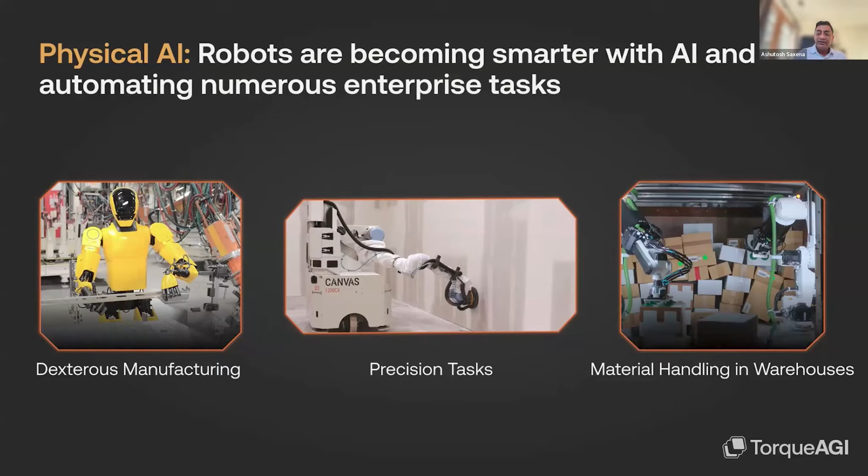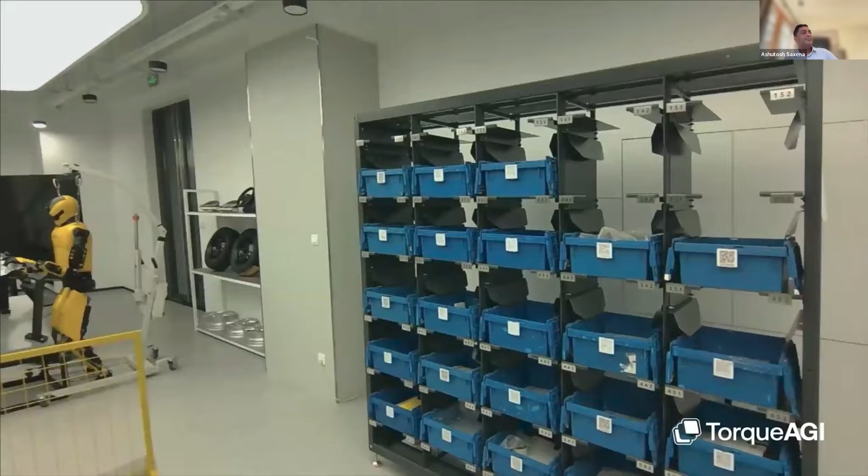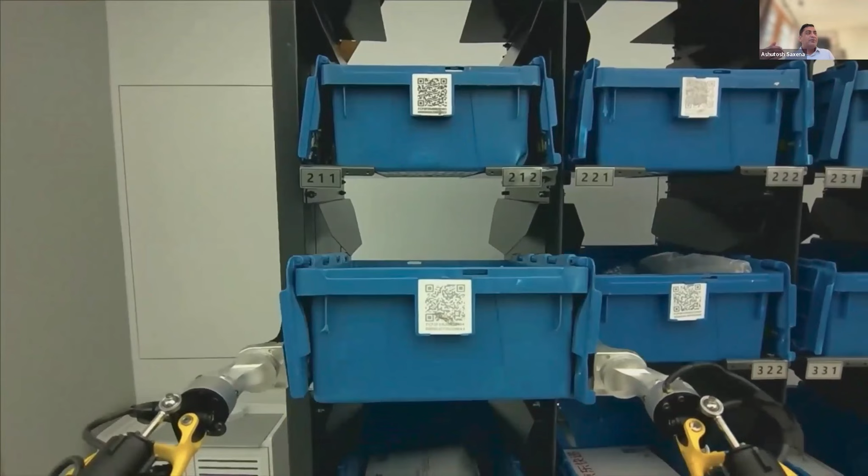And here's a quick video. So here it's a humanoid robot in an automotive factory. There are wheels over there, and it has to reason about the world, find where it should walk, where is the tote box, think about, oh, I need to slide that box first before I can grab it because it has some constraints. And once it has slid like that, then it can pick it up, right? So this is a sequence of tasks that the robot must do, which basically go in the three categories: perception, reasoning, and then acting on it, reacting on it.

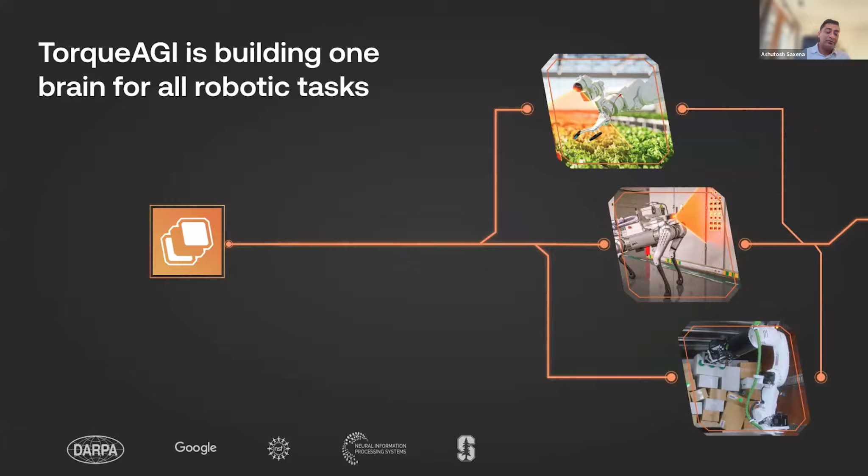So we are essentially building one brain that can deal with variety of robot form factors, all the way from agricultural robots to supply chain robots to different types of robots. And then this is a similar unlocking that has happened in digital AI, like with ChatGPT, that now it is actually possible to build one AI that can be embodied into different robotic form factors and be made functional.

So one of the common themes is obviously data, right? Like how do we get data? How do we train a model? Now that's where the gap arises. So a long time back, in about 2013, when we were doing research, we said, okay, we are going to look at some very interesting tasks. Like let's get a robot to cut food in household environment.

So this is a robot. It has two arms, and the goal is there are about 100 different food items. There are about 500 different recipes. Can we get a robot to perform these tasks, right? So first thing we did is we went online and downloaded billions of images, videos, and robot action data.

We created some training systems, and what that allowed us to do is to train a large model. Now, this was not very large. It was only, I think, about 100 million or 200 million parameters. This was from 8 years back.

But one of the exciting things that opened our eyes was, if you look at it, this is a projection of one of the inner layers of the network that different modalities, which is text, 3D shape, and images were all co-located into the same part of the space. What it means is, if you think about a cup, you say a cup, or you give it a picture of the cup, or you give a 3D model of the cup or a point cloud of the cup, it's all in the same space in the network, in the latent space.

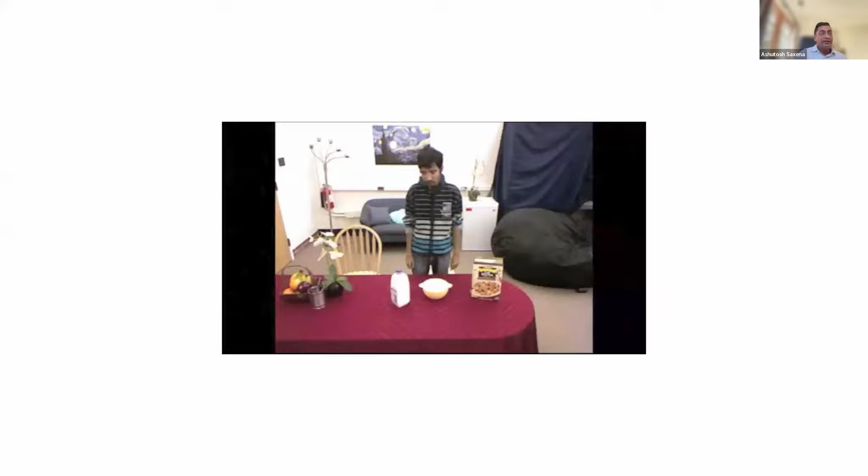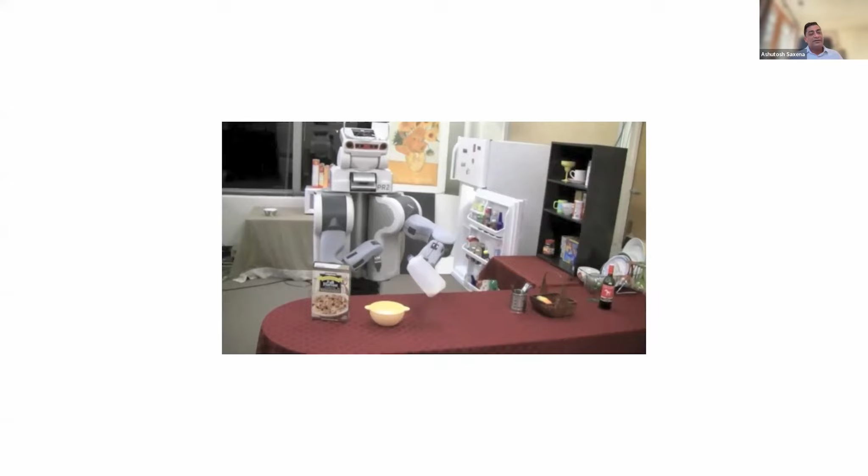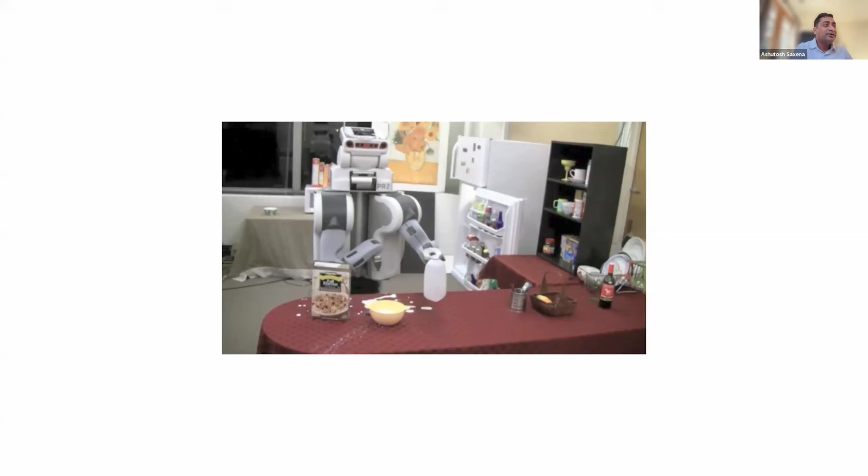So one thing we found by doing a variety of these different works is brute force data collection is costly. So when there was this RT2 paper in about 2023, if you look at, there were a dozen robots, and the task was to open this shelf, the office shelf, and every shelf is similar, every robot is similar. You just have to spend about 50 million or $100 million to collect a lot of data. And if you collect that much data, then you can clone the behavior and then you can start opening the bookshelves. So that's a challenge.

That makes it infeasible. So now what happens is, if we take the same brute force approach of collecting extremely large amounts of data to train physical AI models, the reason it worked in the space of digital AI is because there was a lot of data already available. So when people started training the models, there was 20 years of data already on the internet that you can consume to train the models. That is not the case with physical AI.

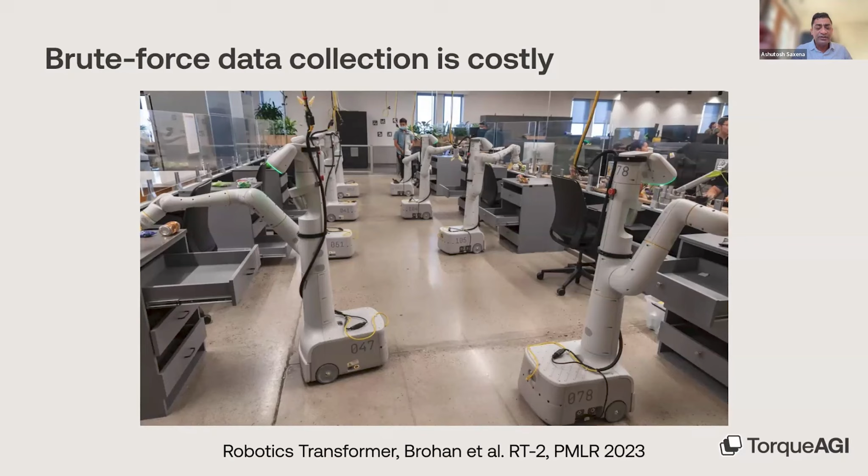Now we can obviously do some data collection by having the robots go in the world, by having videos and so on and so forth. But the gap between the data that we can collect and the data we need in a brute force approach is more than 4 or 5 orders of magnitude. And that's a very big gap.

So at TorqueAGI, what we realized is we have to capture the unique nature of the physical world, which is actually physics, right? So I'll talk about it through an illustrative example. So one of the elements of physics is kinematics. So this particular work was about tracking humans, following their gait, and so on and so forth. And here, what happens is you can take a large amount of data to learn about human gait and behaviors, and then you need millions of data points to train a model.

And the point of this work was, as an illustrative example, if we take the human being and break it into a graph, where the legs are separate, the arms are separate, and this is the isomorphic transformation between this graph and the models. And you are training the models. What happens now is suddenly you have the ability to compose the models. You have broken the problem into small parts, because humans and robots have a kinematic form factor.

So by using that, again, as illustrated in this video, what you will see is the effect of composition, right? So here is a human on the left, which is slowly walking, and the human on the right, which is walking fast.

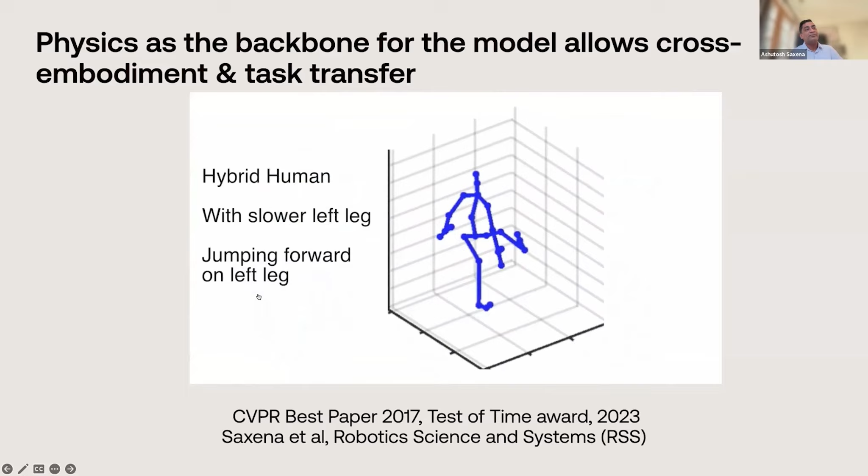And now if you combine these two things, the slow and fast human, you get the effect of a combined walking behavior. So what that means here is that if we start adding this physics reasoning, we can get very powerful cross-embodiment and 1000x data efficiency.

And some of the people in the field like Ilya, Yann LeCun, and others have really been making the point that for an LLM, the amount of training data required to train a model is insanely large. A child is learning intuitive physics like object permanence, gravity, kinematics, and so on, which the current models are not doing.

So, based on this philosophy, what we have done is we have designed our loss function to be cognizant of physics. In a typical large transformer or large scale model, you have, for example, a cosine loss function, which is a great loss function for word vectors or tokenization, where you are taking the cosine angle between the two vectors. But it turns out that if you are dealing with the physical world, a loss function which is motivated by physics is very, very powerful.

So what we have done is incorporated physics-based loss functions and physics neural operators as part of our transformer architecture. If we have an industrial arm unloading boxes in a truck, those get embedded appropriately into a loss function. And if later on we want to train a humanoid on a similar task, sure, the humanoid is not the same as an industrial arm, and this automotive part is not the same as boxes. But as far as AI is concerned, if transformed through appropriate architectures, it starts to work. So we are seeing a very powerful effect of that.

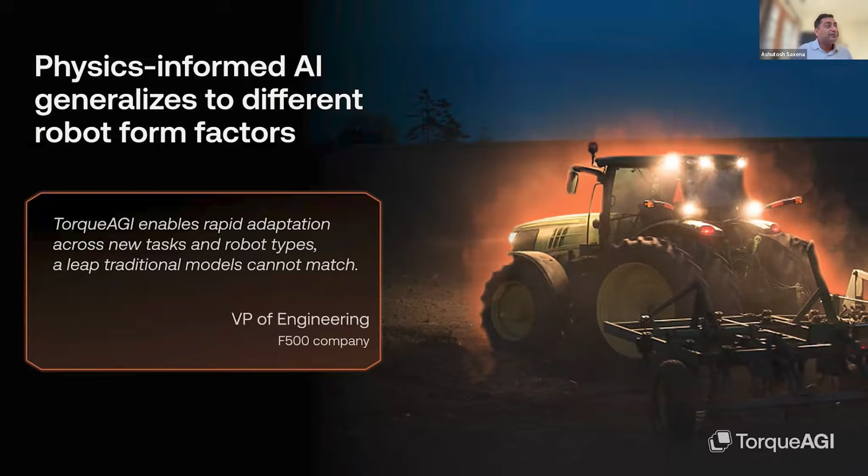Digging a little deeper into the technical architecture, the way it works is that in real time, the input is coming. You have embeddings that map the different modalities, all the way from touch to word vectors to 3D to trajectories, into the same space. This physics-informed VLA model has a loss function which is very physics motivated. The physics neural operators are helping different elements as a tool that is available, and the agents are providing interpretability.

So while the model is one model embedding all different sensor modalities and all different tasks, the agents provide interpretable, modular use of the model. And obviously agents are nothing more than a set of prompts, memory, system, and so on and so forth.

There's one more important part to all this. To get this to work in production, it has to work in real time. And that's a big challenge because the VLA models are good at reasoning, but the problem when you put them in a control loop is that they become extremely slow. So we have achieved 30 FPS performance by really nailing down the GPU orchestration.

So the data goes into the GPU, the model lives in the GPU. This is a heavyweight 27 billion parameter model, optimized for GPU processes. The agents that are providing the output and flow are using pointers, and these are very thin agents.

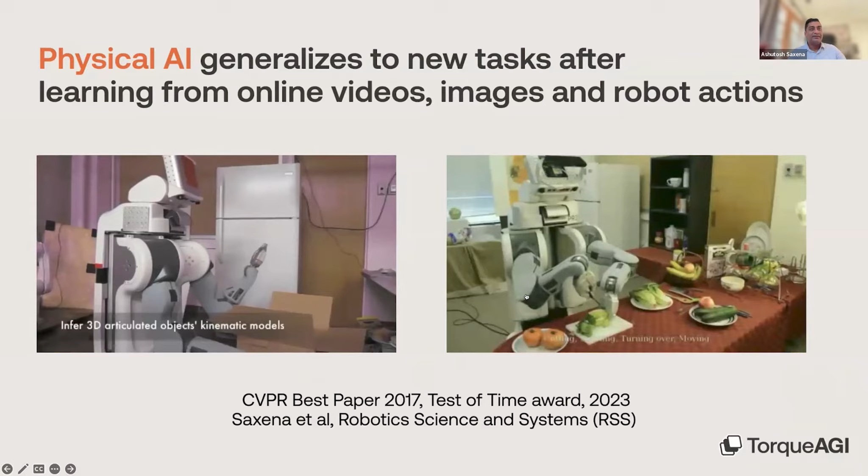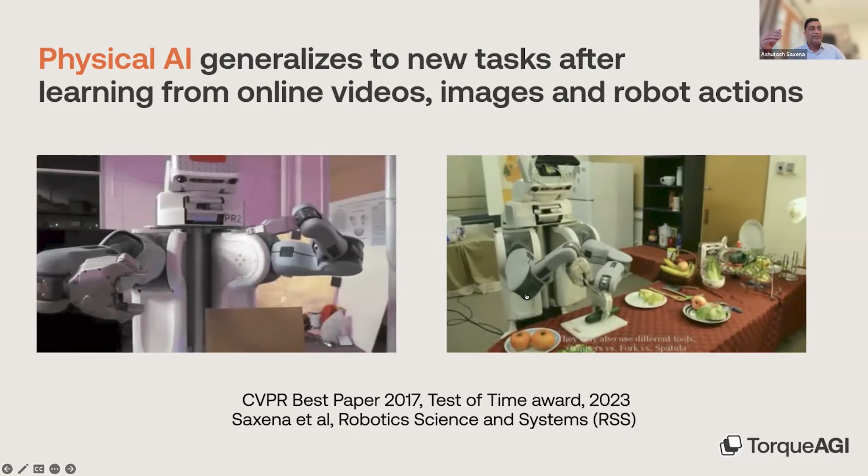So with a blunt knife to cut a variety of food items from tomatoes to lettuce to cucumber to so many other things, it is a pretty challenging task. And the reason it is able to work through that is it is learning a mental model of basic physics. As it is manipulating the box, it is making a mental model of, oh, box has articulation. It has a few other things. And that allows us to perform many tasks, including long horizon tasks.

So this video is a little. Take some coffee in a cup. Add ice cream of your choice. Finally, add raspberry syrup to the mixture.

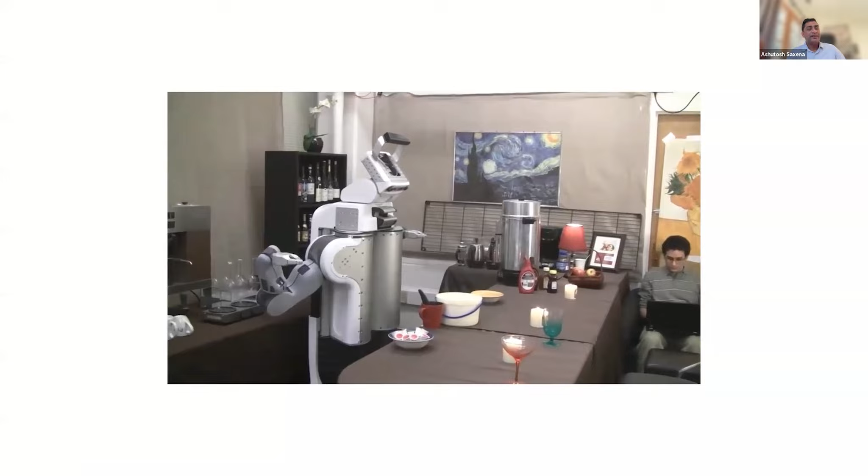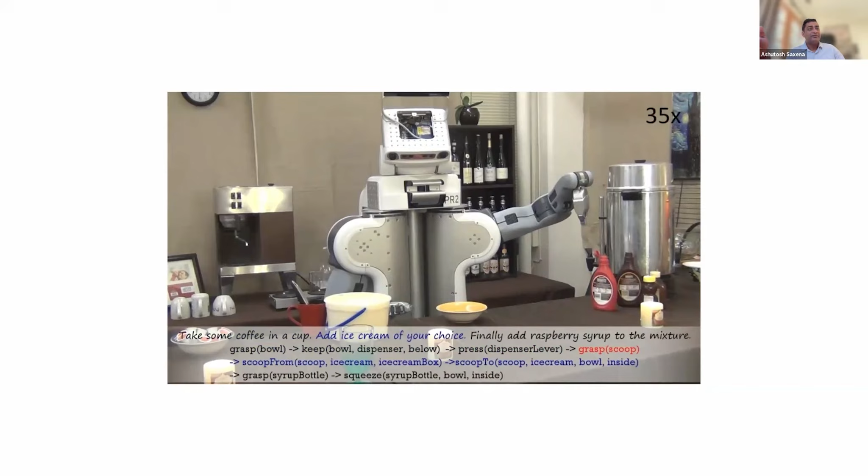So in this case, the person asked to make something called an affogato, which is take ice cream of your choice, add raspberry syrup, put some coffee or something else in it. So the robot is able to map and reason about, oh, I have to get coffee. So is it a coffee mug or is it a coffee dispenser? If it's a coffee dispenser, how do I press the particular lever?

If it's an ice cream, I need to do a scooping action. And if I have to now go use the raspberry syrup, what is the motion I need to do? So it's able to sequence long horizon tasks in a thinking or a planning loop, and then execute on it through a React loop at the bottom. So it's a two-tier architecture that is being implemented here.

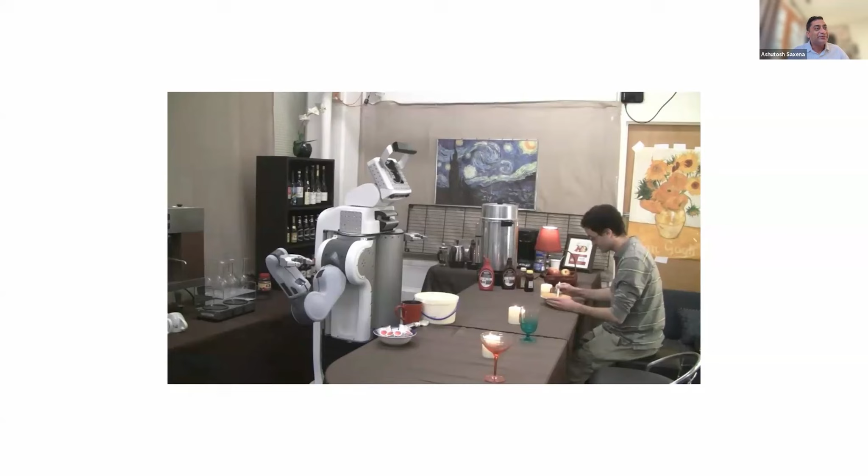The funny thing is, this particular video, this is from about 7 years back. It took forever to get the ice cream, so ice cream had melted back then. But now we are living in a different world. The GPUs are more powerful. We can run things in real time, and this is the most surprising thing that we found.

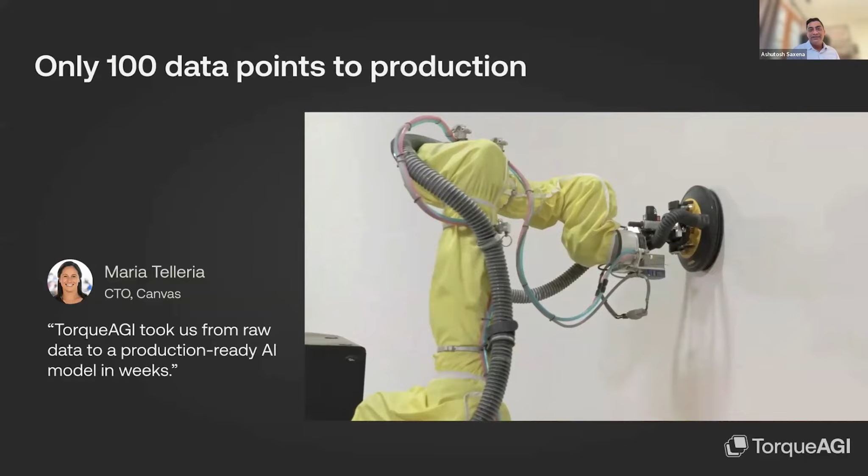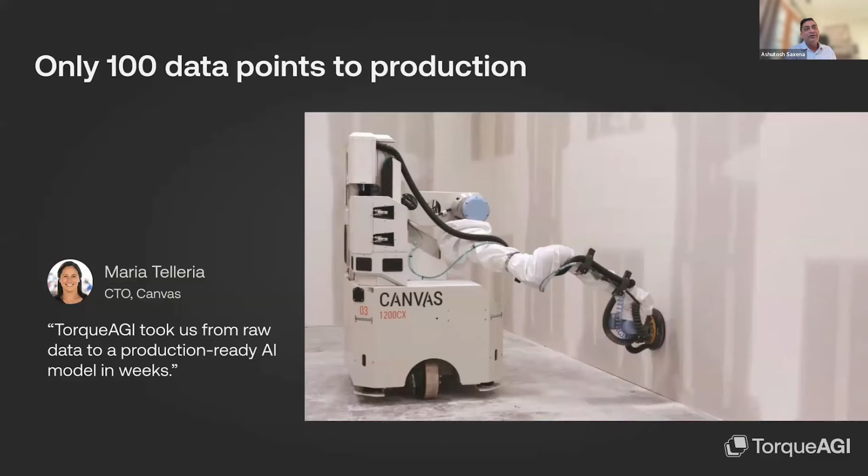That as we implemented these techniques on, for example, this construction robot, which is doing painting, and for those of you who have ever dealt with construction or drywall, this is a very hard task to make a smooth drywall. You have to paint, you have to scrub, you have to find out the seams, and so on and so forth. And the interesting thing is to get the full production power, we had to only use about 100 examples.

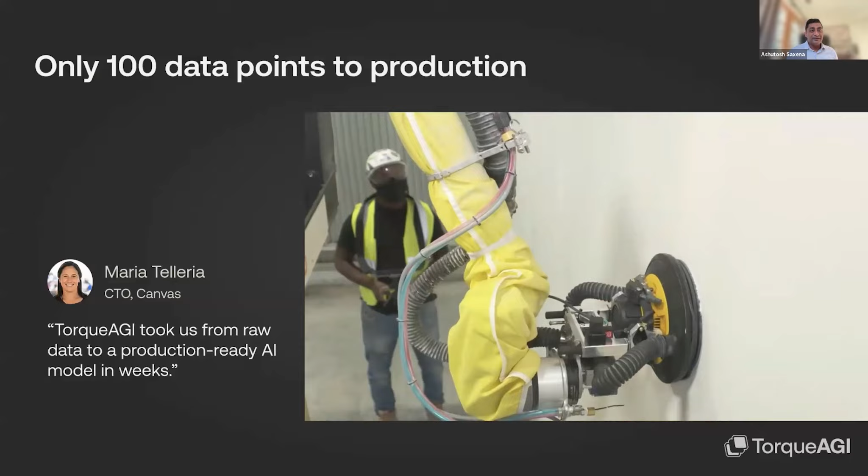And the reason is it has a very strong base knowledge of the world based on internet data, public data sets, and so on and so forth. Then it has learned a reasonable model of the physics. With those two, it has to only see a few robot examples to get performant output. That is why it is able to do this for only 100 examples.

So the real way to use the model that we are going forward with is that we have a general model, and we are creating specialized agents for different robots and different tasks within each robot. And this is how it looks like. So think of the model as the back end, and the agents at the front end. Agents define what you want to do.

One of the reasons that this architecture is more useful than an end-to-end architecture, which we don't like, we like this interpretable modular architecture, is because it gives a product handle or interpretability to the equation. Now, human and the obstacle, for a robot, they are the same thing. Humans are obstacles your robot wants to avoid. But it turns out the requirement to avoid humans is 99.999 versus obstacles which you can once in a while bump. So this provides that level of interpretability.

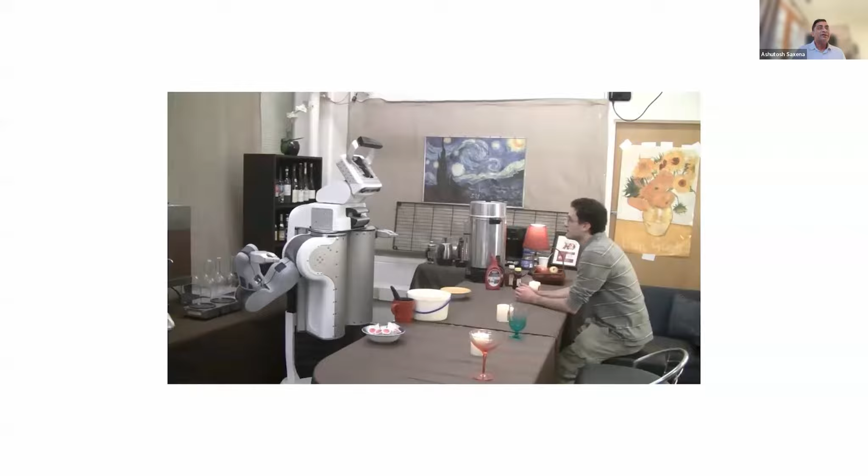And to answer the question, yes, the model can ingest a variety of different form factors, or this is how it's working for a variety of different sensors, whether it is 3D, 2D, action, trajectories are all embedded into the same model space. So as far as the model and the agents are concerned, it is very agnostic, and it can work with a variety of different sensors from 3D, 2D, audio, trajectory data, and so on and so forth.

Coming back to here, and now moving on, the way we are programming robots is entirely changing. Earlier, for each of these boxes, you would write a traditional computer program, and you would use one specific AI, maybe a trained model. That's how it used to work. Now what is happening is, excuse me, now what is happening is you are looking at an entirely new way of programming robot structures.

So you have a very powerful model in the back, which is living on the edge, on the robot PC, in the GPU. And now, when you are using the model or harnessing the model, you are designing it through an agent. An agent is a set of prompts, memory, tools, and certain parameters. So in 80% of the cases, you are no longer writing traditional computer programs.

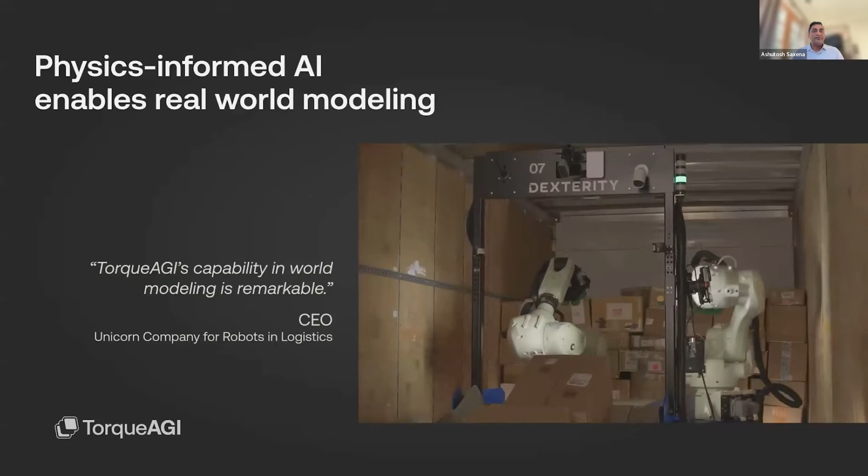And this physics is what is really giving it that power for a world model. So if you look at some of the examples, when you think about these boxes piled up in the back of a truck, given the noise in the sensor data, the nuances of doing robot control, it's a very hard problem, even in that narrow space. So the model has to reason about which box is on top of the other box, what is going on, and that is what is allowing these robots to perform in practice. For example, you have criteria about how to pack these boxes in a nice way and do it in an efficient manner. So this is what a typical application looks like in this box packing space.

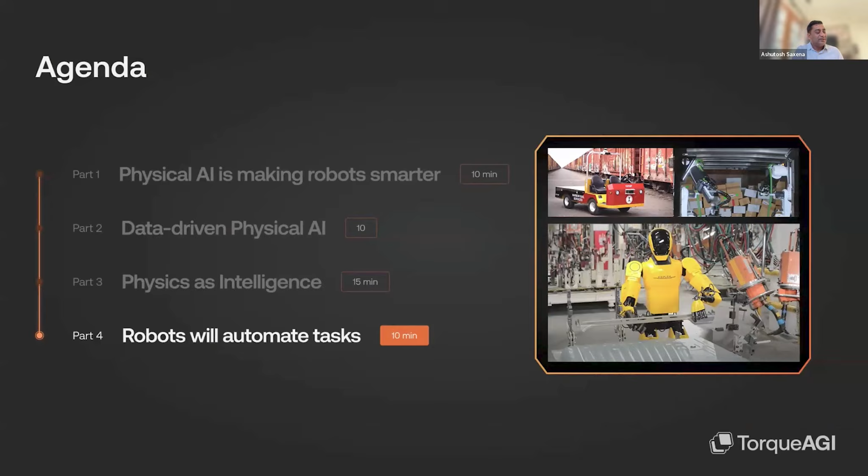I will show you a few more examples of how we have taken our model, distilled it for a particular application, and built agents out of it. So we already talked about the box handling scenario, and this is a little bit more insight into what it is actually doing. So of these agents in this logistics example, one agent is making the robot cognizant of humans in the environment. So a robot should slow down if a human is around. The second one is saying, oh, I have found the boxes, but how are they packed up? What goes on top of each other, and so on and so forth. So now you can extend it.

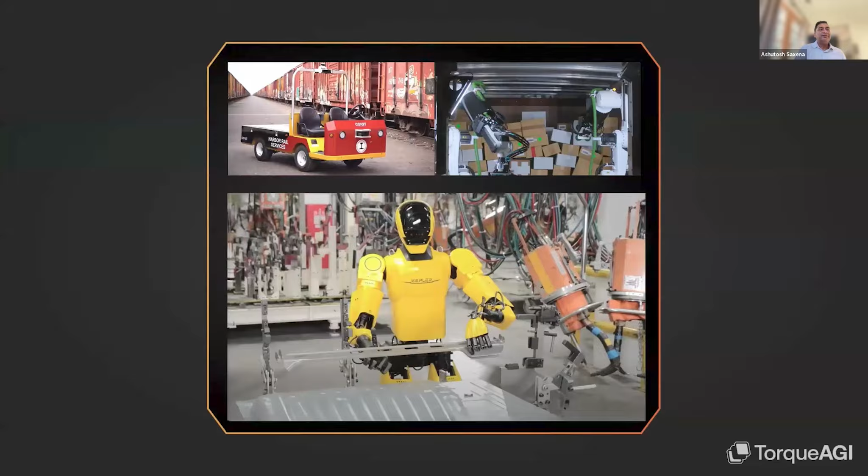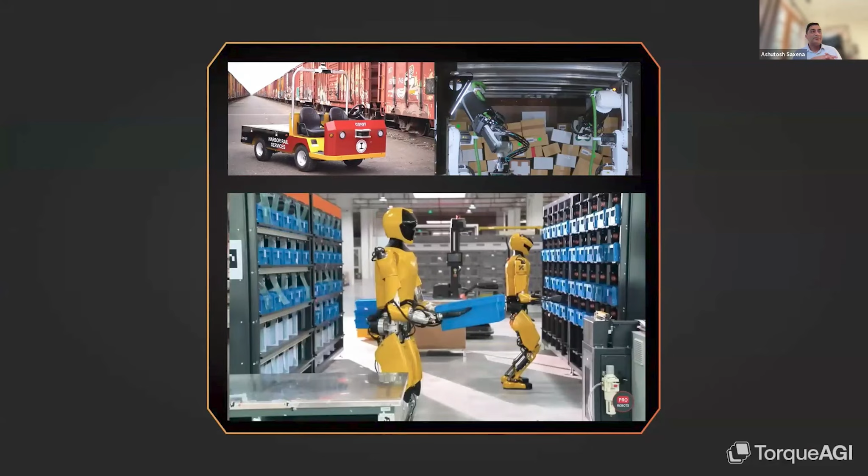What we are looking at is, hey, can we take some of these models and now unlock newer use cases? Now, luggage is not boxes, but as far as AI is concerned, it's very powerful. The same architecture can now handle it, and we can design a robot that can handle luggage at the airport. And these are some of the other robots that we are looking at. So one of them is a humanoid application where we are having a humanoid work on factory floors, assembling tasks, moving materials. We are having construction robots, drivable robots.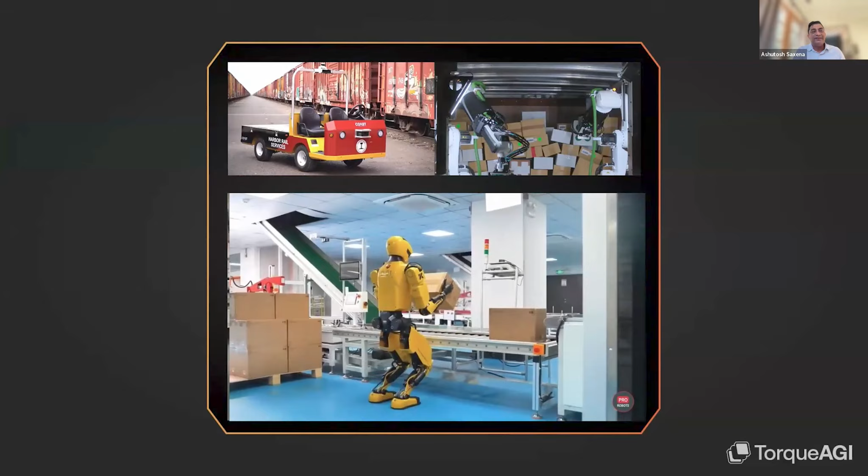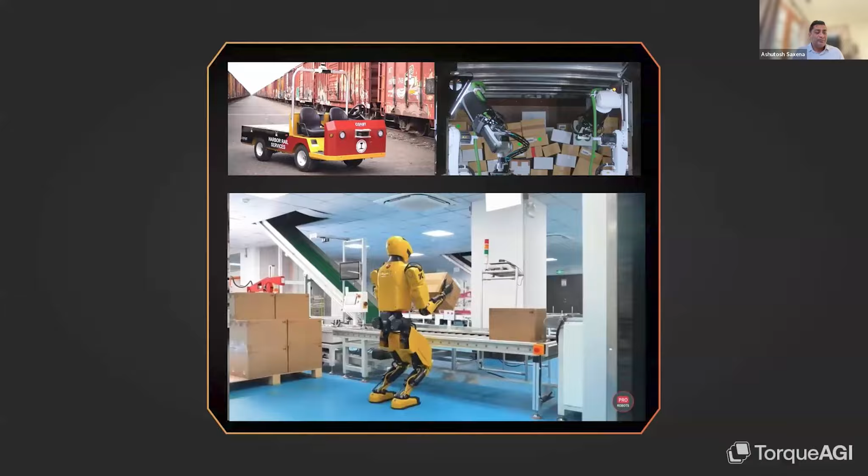So these are very exciting times, because each of these jobs has 10,000 plus stations in every country, in every company. So, for example, a robot that can handle boxes, think about how many boxes are handled every day. A robot that can assemble a gearbox, think about in a large company how many gearboxes are assembled every month. So that's why it's a huge opportunity to have robots really bring a massive change. And the key to bringing this massive change is the right AI. The AI that can consider data, that can work in real time, but also understand and execute with physics in mind.